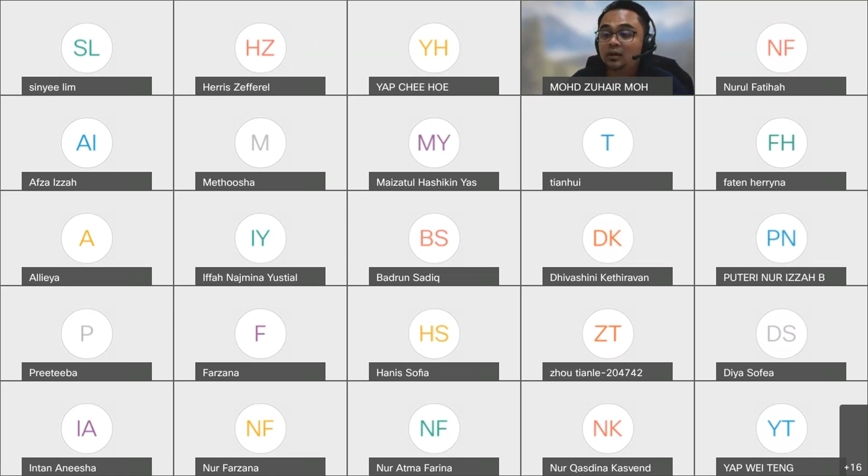So please put this date on your calendar, test two on 16th of June. And what will be covered in test two?

Well, basically what will be covered in this tutorial includes the topic of pure substance as well as closed system energy balance. But for the classes, we've already learned up until the open system energy balance, right?

But for the test, to be honest, I haven't even prepared the questions yet. I'm planning to just ask you up until the closed system energy balance. But any changes will be updated from time to time.

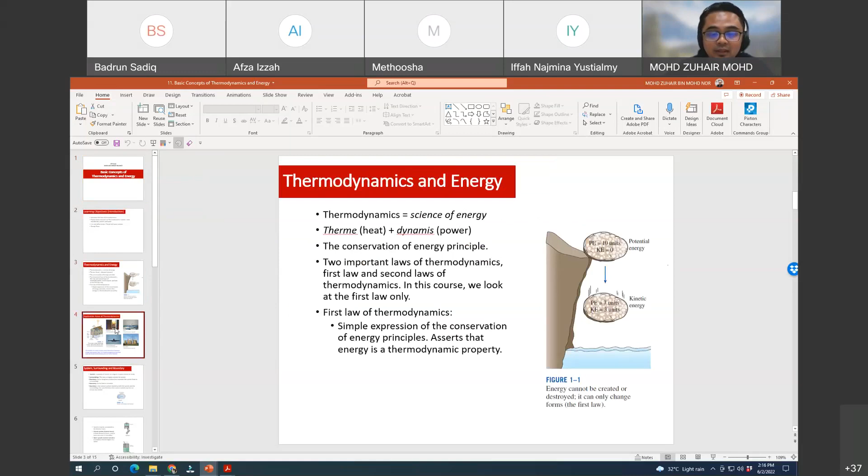What you're going to learn later will be more detailed, but in our case I spared two topics for this. The first two topics are more about theories, which I then asked during the quiz, and it's just basic concepts you need to understand, because some of the terms are a bit confusing compared to the mass balance part. But if you do your revision and refer to the textbook, I hope you won't get confused.

So I'm going to start with the first one, which is the introduction to thermodynamics. There are some terms you need to understand, because these terms will be used in the question.

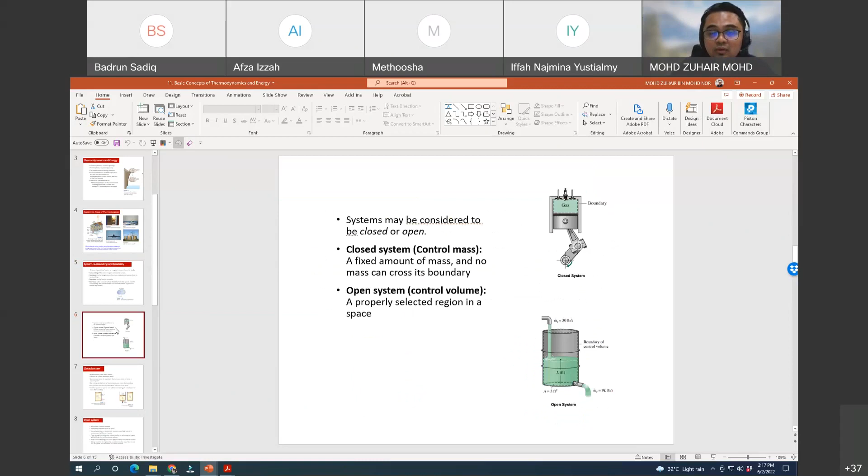When I said about the closed system and the open system, you should straight away know what does the closed and open system mean. In terms of the properties, what kind of properties, and in terms of the process cycle, steady state flow, and so on. Okay, so this is about the first slide.

This slide is just about the theory, and then we move to the second part, which is the properties of pure substances. Still there are few theories, but I just want to highlight that the pure substances we focus on here are more or less water and vapor. If you refer to the real industrial process, it will definitely involve samples that are a bit more complex instead of water. But for us, for the sake of giving you basic understanding on how to do the calculation and how to refer to the steam table, that's why we are referring to just water.

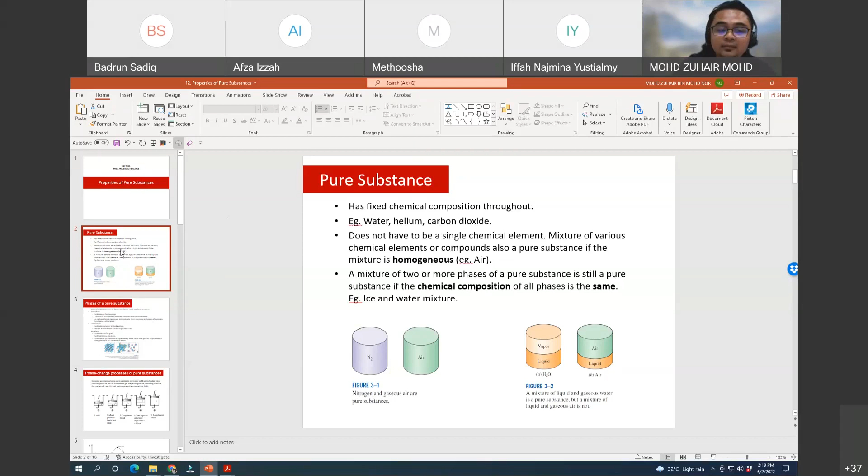So if you refer to the property table that I gave you, it's all about water: steam, saturated water, saturated vapor, superheated steam, and so on. So don't worry when it's stated here as pure substances - I'm referring to water for the time being. But later, in the other subject that is more complex, the term pure substance will be a bit different. For us, let's just speak with water and also ideal gas.

In terms of phase, this is just to give you some understanding about different terms such as the compressed liquid, saturated vapor, saturated liquid, superheated, so that you can at least imagine when phase changes happen during the process. You can imagine in the T-V diagram what happened, in which region the sample is now, because it will give you more understanding on how to do the calculation.

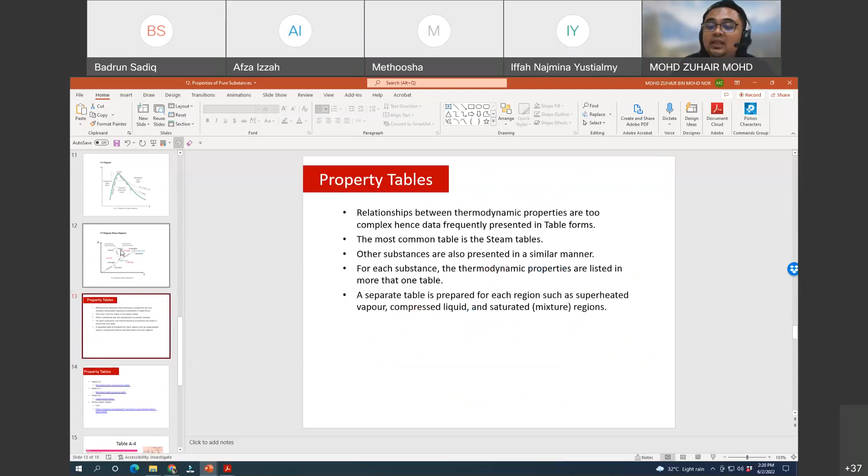But the most important thing here is the property table, because this is something that you will refer to not only for this subject but other courses as well. And if you notice the one that I gave you, we have so many tables, right, mixed together. But for us, for the time being, for this course, because this is just an introduction, we're just going to focus on three tables, which is table A4, table A5, and table A6.

Table A4 and A5 are saturated water - one is based on the temperature table, and one is based on the pressure table. And table A6 is about the superheated water or superheated vapor. I really hope that you are going to at least print out these three tables, so that you can do some practice in order to find all the data from the table.

This table has been prepared by researchers based on the condition of the pure substance, which is water. They have done their very tedious work to prepare and get the value for all of the properties, such as the enthalpy, the internal energy, and so on. So that's why it's convenient for us to just refer to the table.

We also have the online steam table, because nowadays it's more convenient. But in the test you cannot refer to the online steam table. In the case you want to refer to it otherwise, you can also refer to the website - the link has been given here. You just put in the information, and you're going to get all the properties as what you want. So this is the link you can refer to.

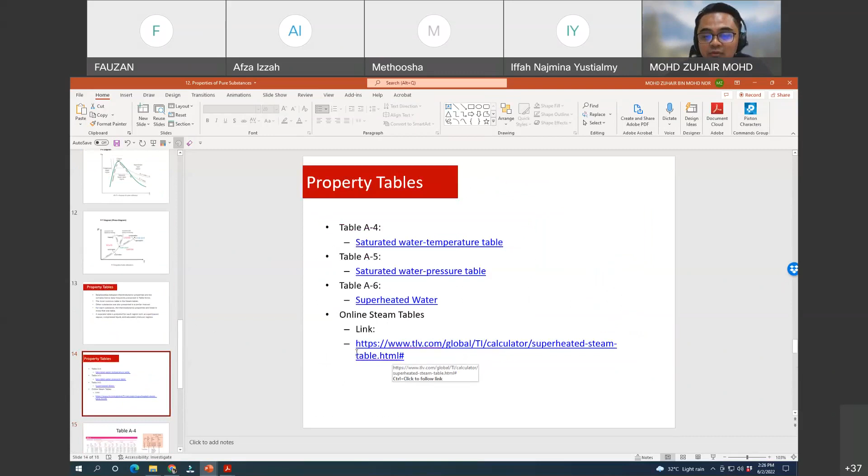Okay, or otherwise you can just go to the website here, just put in the value so that you're going to get the property. Okay, so that's about the pure substances, and then form of energy.

Okay, so the form of energy well actually is just very basic. We have kinetic energy, potential energy, and the internal energy. In which for the potential and kinetic energy, I think that's very straightforward because that's something that you've learned before.

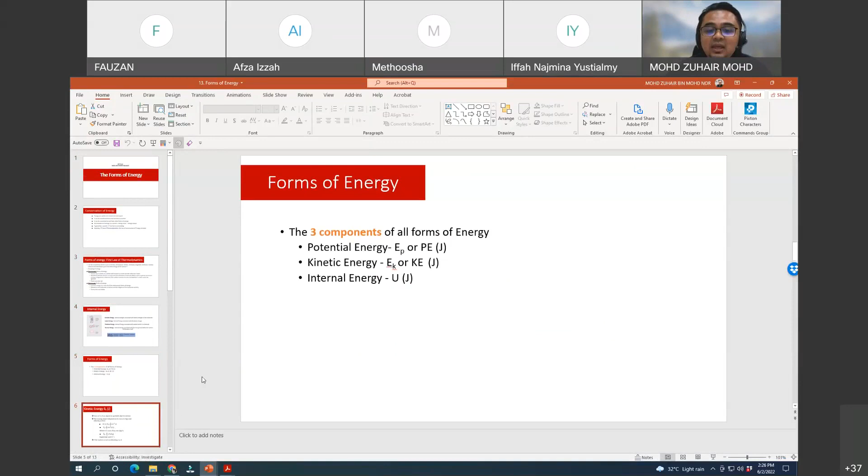But for the internal energy, maybe this is a bit more tricky because it's involved in many kinds, it's related to many things. As long as it's involved the interaction of molecules, that what we consider as the internal energy. So something to do with or any other energy beside potential and kinetic energy will be considered as the internal energy.

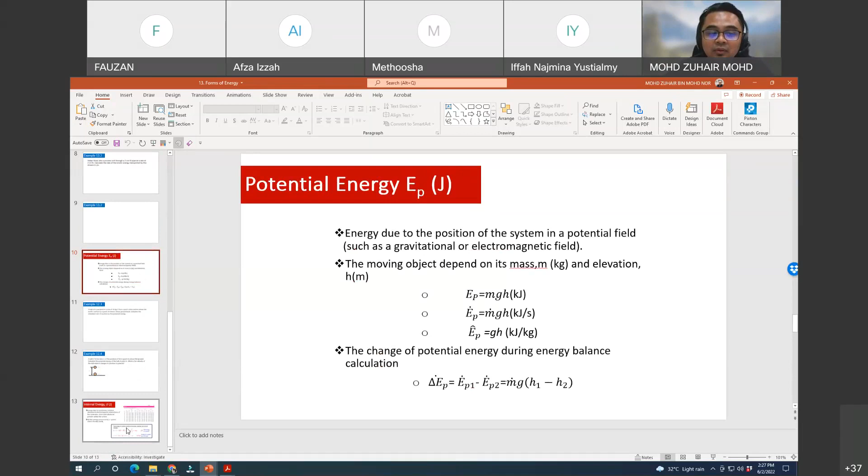Okay, so you need to know how to calculate all of these for you to find the calculation for the energy balance. Okay, for the internal energy, that's why in the previous topic you need to learn on how to find the value in the steam table, because normally for the internal energy we have to refer to the steam table. Sorry, sometimes I use the term property table, but most of the time I'm just going to use the steam table. Okay, so people, when I say steam table, it's also referred to the same table.

Okay, so the internal energy normally we're going to get the value from the steam table. Okay, so it's about the form of energy, and then we go to the closed system energy balance. Okay, so for the energy balance, I hope you don't get confused with the way we calculate the energy, the mass balance, because for the mass balance, we can afford to calculate one single process and also multiple process, you know, because the one that involved is just mass.

But for the energy, we have to calculate not only the internal energy, we have to calculate the heat, the work, the potential energy, and also the kinetic energy. There are so many things. So that's why for this course, we normally just refer to one single process, in which this one single process also involves so much energy. If we compare with the mass balance, for the mass balance part we have single and multiple processes, right? For the energy, we're going to focus on one process.

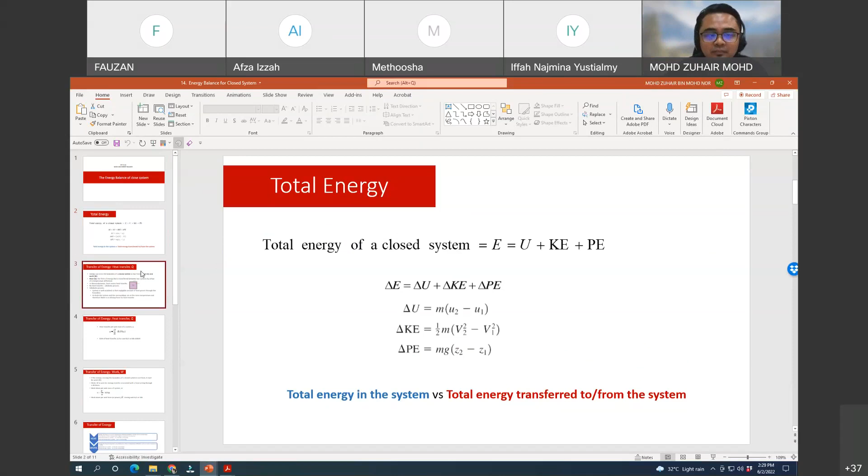Okay. So basically for the energy balance is just... wait a moment. Okay. Sorry, this is not.

Okay. So the energy balance equation that you need to remember is the change of internal energy plus the change of kinetic energy plus the change of potential energy is equal to Q plus W. Sorry, this is plus W, not minus W. Actually Q and W depend on the definition. If Q is going into the system, then it will have a positive sign, but if the system produces heat and it is released into the surroundings, then it will be considered a negative value.

Similarly for work, if work is put into the system, for instance if we introduce a stirrer in a tank, the work is supplied by the surroundings to the system, so that's positive work. But if the work is provided by the system, let's say because of expansion some movement happens from the system to the surroundings, then that can be considered a negative work value. So that's also very important for you to understand, because it will be involved in the energy balance calculation.

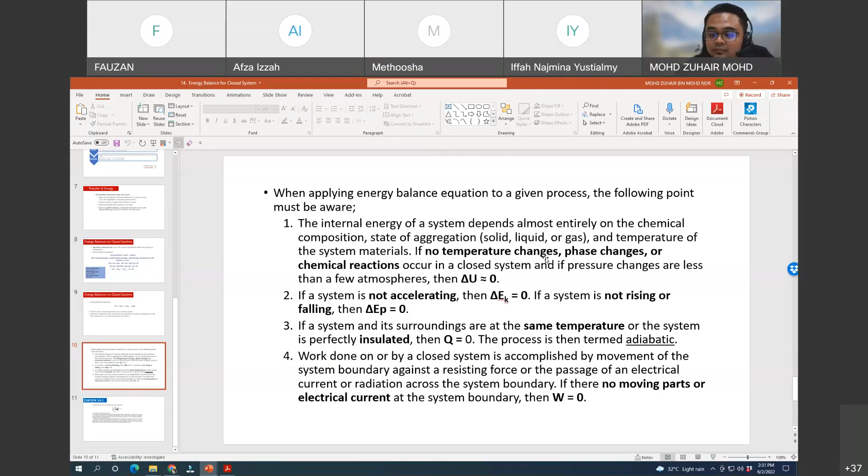Okay, so that's a brief summary of what we have covered this week. I already provided you with another topic, which is the energy balance of the closed system, with more details about the closed system. In most situations, the closed system will not involve potential and kinetic energy, because most of the time it's stationary, since no mass goes in or out. When there is no movement of the mass, most of the time we assume the kinetic and potential energy will be zero. So it's just a matter of internal energy, work, and heat.

Even the work will sometimes be zero. So the closed system is a bit easier compared to the open system. But we'll now do the tutorial in order to solve the questions and get more understanding. So, PDF. Okay, let's start with tutorial 5.

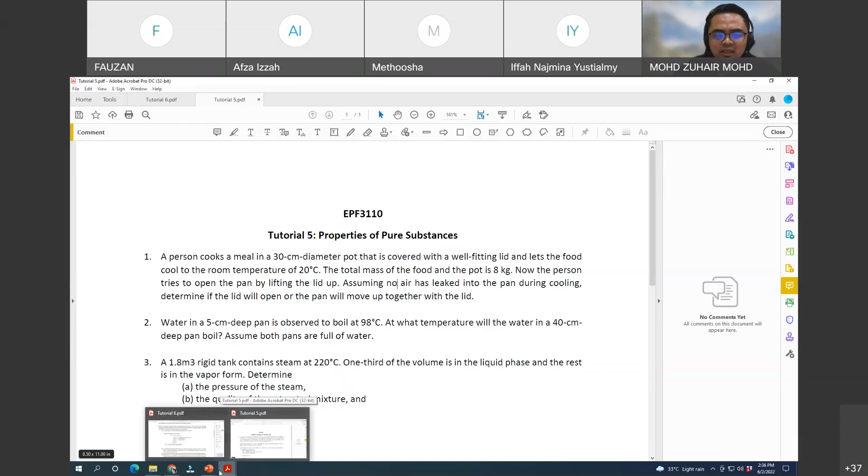Okay, so dia nak cuba nak buka. Itulah periuk tu. Assuming no air has leaked into the pan during cooling, determine if the lid will open or the pan will move up together with the lid. Okay, so when we have some question like this, first of all, what we can do is just to draw first and get all the information before we can try to solve it. Okay, so this is for question 1.

Okay, so we have the pot, and we have the lid. Okay, ini lid dia ya. Okay, so the weight of this is 8 kg. Okay, sorry. So it's not W, it's mass. The mass that we have is equal to 8 kg. And now we want to know the force that is required for us to lift up the lid of the pot.

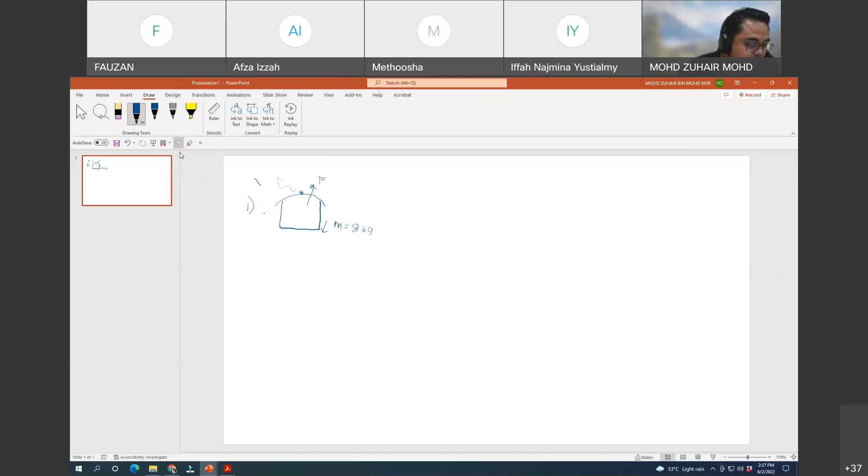Okay, so now the first thing, the temperature is 20 degrees Celsius. So when we want to find the force, first we need to find the pressure. The pressure inside and the atmospheric pressure, in order for us to find F, because F is equal to pressure times the area. So in order for us to find the pressure inside here, we need to refer to the steam table.

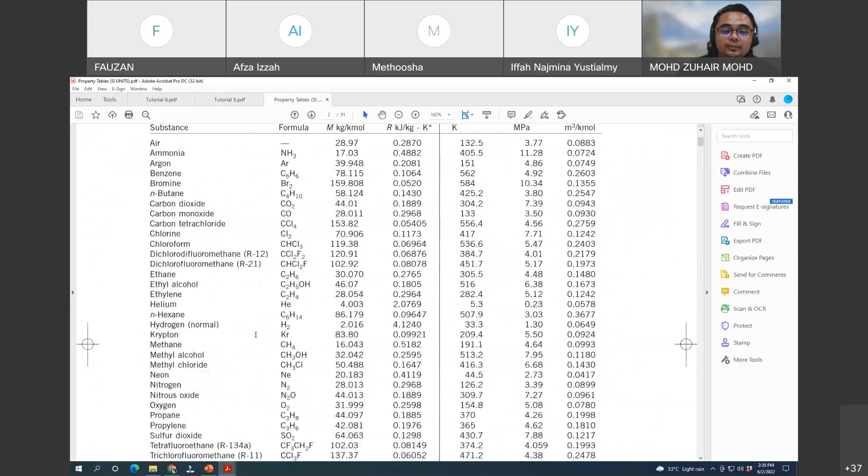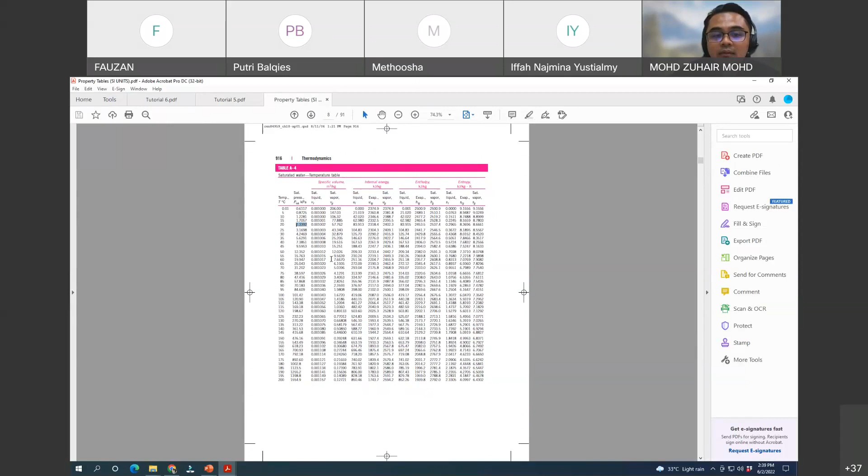Okay, so at 20 degrees Celsius, if you refer to the steam table, the P, how much? Boleh tengok tak dekat dalam steam table? For 20 degrees, steam table A4, at the temperature of 20, what is the saturated pressure? Okay. 2.3392 kilopascal.

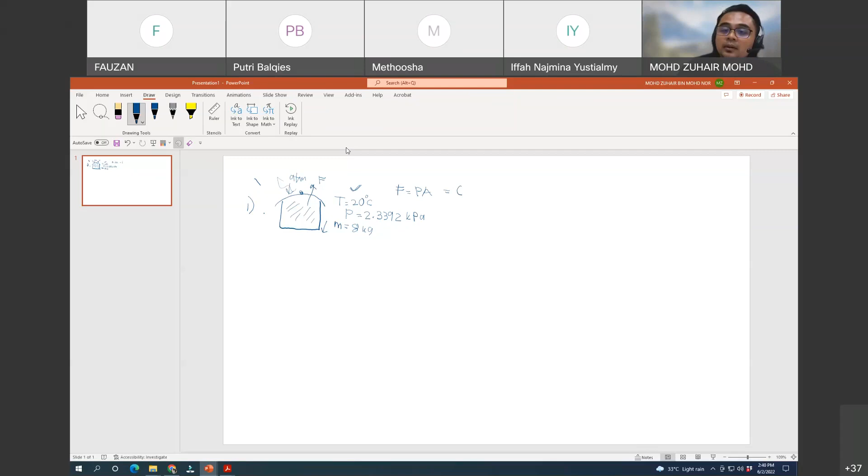Okay, so in order for us to find F, this is equal to the difference between P atm, atmosphere, minus the pressure inside of the pot, times A, the area. And for the atmospheric pressure, we know the value is 101.32 kilopascal minus the pressure inside, 2.3392 kilopascal. And then we have to times the area, which is pi, and it's already stated that the pot has a diameter of 30 cm, right? So we can do the calculation.

So at the end, we are going to get 6.996 kilopascal meter squared. And then we can do this conversion in order for us to find the value in Newton. So 100 kilopascal is equal to 10 to the power of 5 Newton per meter squared. So at the end, we are going to get the value of 6996 Newton. Okay, so this is the force that is required for us to lift up the lid.

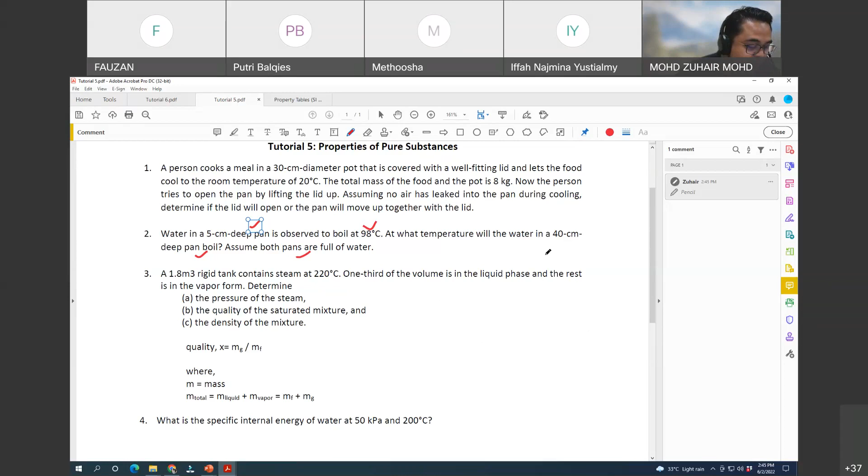What temperature if the water is boiled in the 40 cm deep pan? Okay, so first of all, what you can do is to locate first. Okay, number 2. So we have the pot.

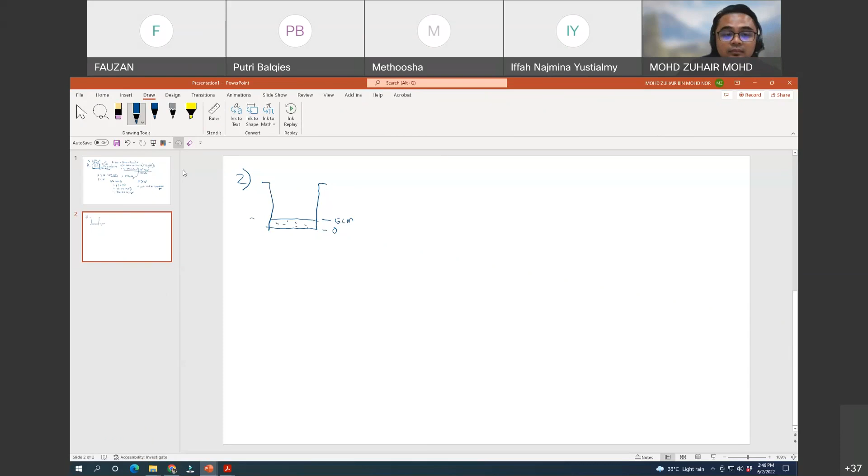So the first one is at 5 cm. Okay. So this is 0, this is 5 cm. Okay. And it stated the temperature, which is 98. You see, what about if we increase the water to 40 cm? What is the temperature? Okay, so first of all, we already have the temperature here for us to get the pressure.

Yeah, P equals rho g h. So pressure is equal to density times gravity times height in order for us to get the pressure. Okay, so what you're going to do first, we will refer to the steam table to find the pressure at this condition, which is 5 cm, 98 degrees C.

Okay, so if you refer to the steam table at 100 degrees C, sorry, 98, okay, we couldn't find 98 degrees C. Can't, right? 98. Hmm.

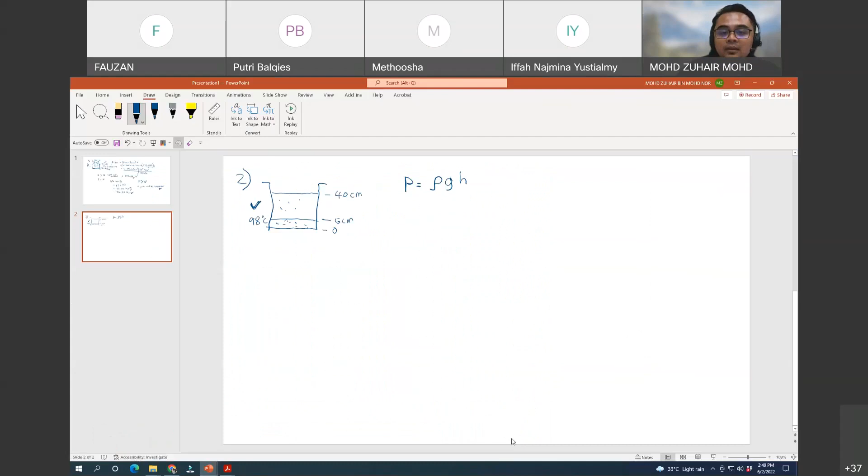Okay. If you refer here, at 95 degrees C, the saturated pressure will be 84.6. And at 100 degrees, the saturated pressure will be 101.42. So we are going to do interpolation for that, okay? For 100 degrees C, the P saturated will be 101.42 kilopascal. For 95 degrees C, the P saturated will be 84.609 kilopascal.

Okay, so how to find it at 98 degrees C? This is where we do the interpolation, which involves, first of all, 98 minus 95, the lower one, and then 100 minus 95. We minus this with the lower number, and then the highest number minus the lowest one. Okay, and then we are going to calculate the difference between these two.

101.42 minus 84.609. Okay, and then plus the lowest value, which is 84.609. So at the end, you are going to get the P sat for the 98 degrees C condition, which is 94.6956 kilopascal. So this is what I call interpolation.

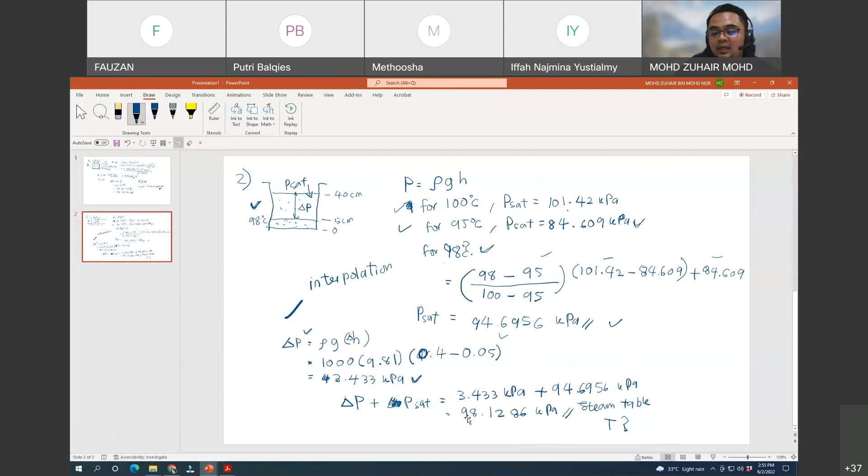Okay, so from here we can refer to the steam table to get the temperature. Because now this is pressure instead of temperature, instead of table A4, we need to go to table A5, because it's now based on the pressure. So what is the value? 98.12. We don't have 98.12 here, right? We only have 75 and 100 kilopascal.

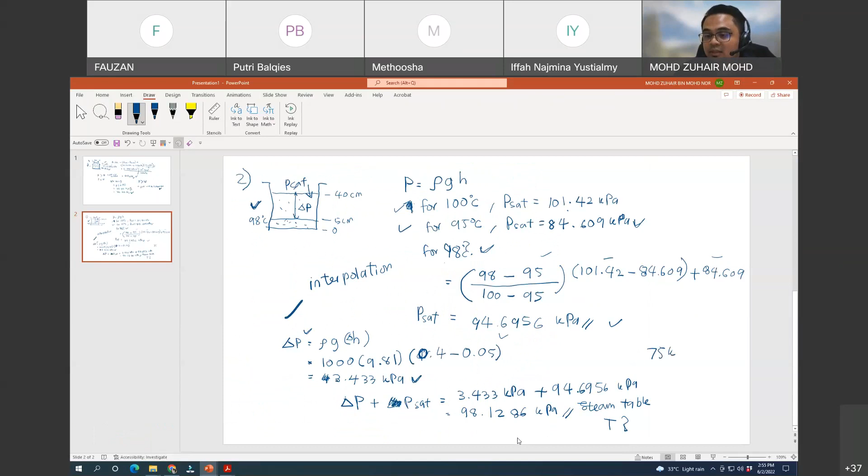So in order to find the T saturated there, we need to do another interpolation. Okay, so for that, I want you to do it. Let's say this is for 75 kilopascal, and for the 100 kilopascal, what is the value? 91.76 degrees Celsius. At 100, we have 99.61. Yes, 99.61.

Okay, so similar to this one, you need to do the interpolation. I'm not going to show you, but I'll give you the final answer: if we increase the water to 40 centimeters, the temperature will be 99.03 degrees Celsius. Okay, so this will be the final answer. You need to do some interpolation, okay? So this is for question 2. Any questions?

Okay, so now we are going to do question 3. Question 3: a 1.8 cubic meter rigid tank contains steam at 220 degrees C. One third of the volume is in the liquid phase and the rest is in the vapor form. Determine the pressure of the steam. What is its pressure? And then the quality of the saturated mixture. The quality of the saturated mixture is the mass fraction.

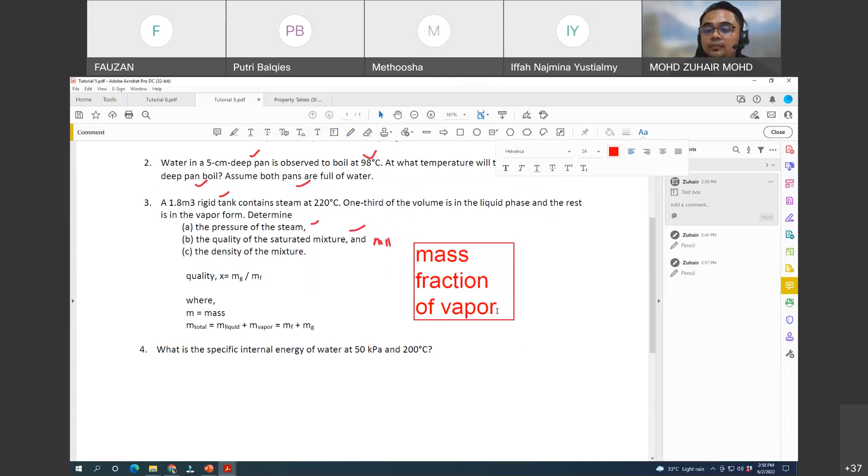Mass fraction of vapor. Okay, so for this one, normally we just use the symbol X. And lastly, the density of the mixture. Okay, so the quality is already stated here. The quality X is equal to the mass of the gas divided by the total mass.

Okay, so let's start with the first one, 3A, the pressure of the steam. So we have the temperature at 220, and this is a mixture between vapor and liquid. So we need to refer to the right table, which is steam table A4. The T is 220 degrees C. So if you refer to table A4, the P saturated will be,

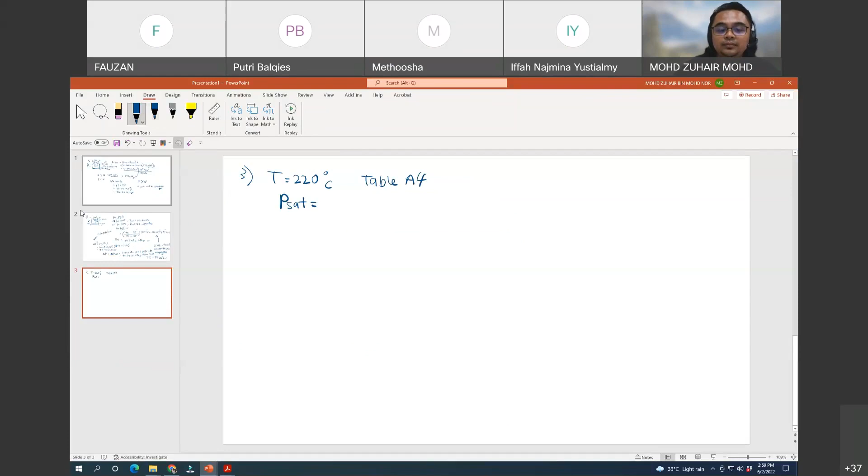so we go to table A4, at the temperature of 220, the P saturated will be 2319.6 kilopascal. Okay, so this answers the first question, the pressure of the steam. We already had the temperature, now we know the pressure of the steam. And then the second question is the quality, which is the mass fraction. Okay, so the mass fraction, this is A, this is B.

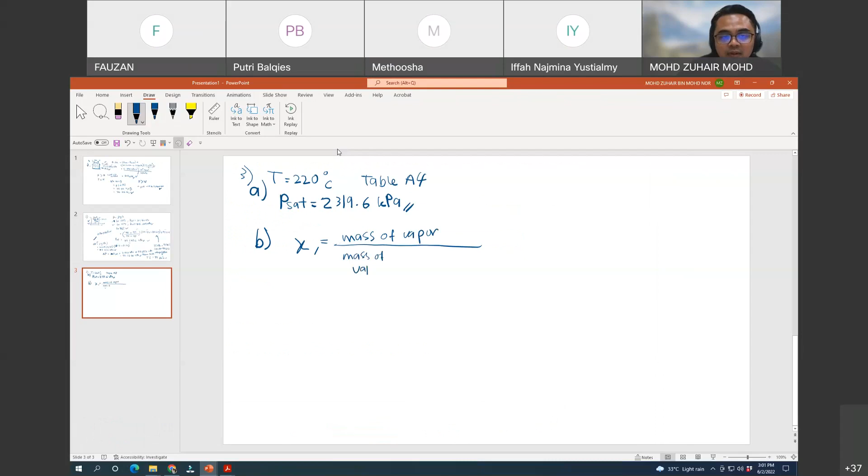Okay. The mass fraction will be the mass of vapor divided by mass of vapor plus mass of liquid. Okay, so how to find all of this mass? In order for us to find the mass, we need to find each one first, okay?

To calculate the mass of the liquid, we need to also refer to the steam table, because here, if you notice, this is based on the kg. So this is all specific. So after some rearrangement, we can find the mass if we have, let's say, the specific volume and so on, okay? So I'm going to show you now. For instance, the first one: mass will be the volume divided by the specific volume of the fluid. We start with the fluid first, okay?

So the volume of the fluid, how to find the volume of the fluid? Well, basically the question already stated that the total volume is 1.8, okay? And it's already stated here that 1/3 of the volume is liquid and the rest is vapor form. So we can just use that to find it. 1/3 is the liquid and the rest, 2/3, is vapor. For liquid, 1.8 times 1/3. So this will be the volume in meter cube.

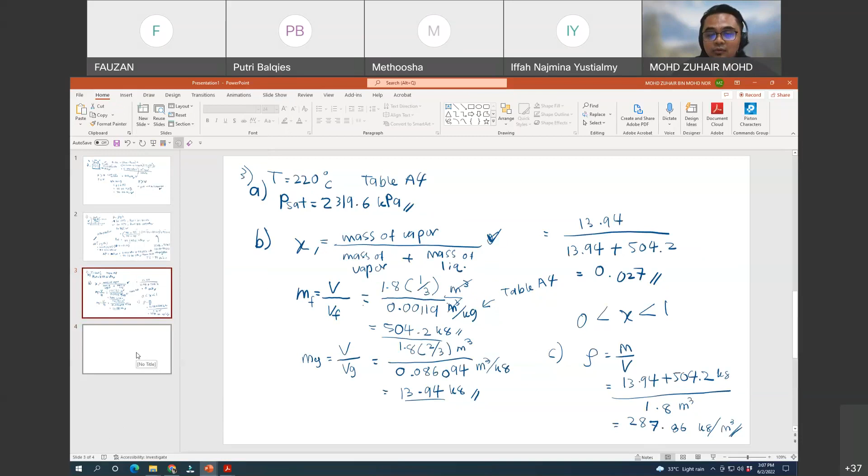Okay, and then we move to the last question, which is what is the specific internal energy of water at 50 kilopascal and 200 degrees C. Normally, the normal type of steam table that we refer to provides only one, either the pressure or the temperature. But in this case, it already gives you two values, the pressure and also the temperature. So which table should we use?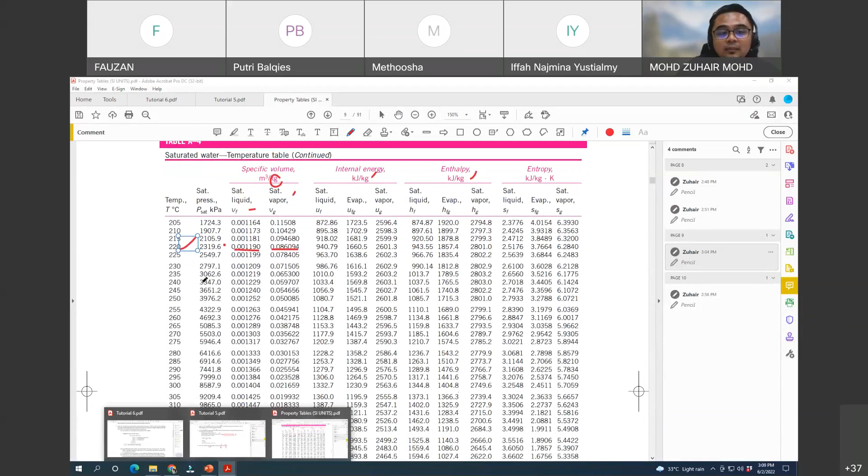So first of all, we want to determine whether this is a mixture of saturated water and vapor, or is this superheated steam? I'm just going to list it first. Number 4: we have P 50 kilopascal, and T, which is 200 degrees C. Let's start with the temperature first. The temperature is 200. But based on here, when the temperature is 200, the pressure is 1554.9. But the one that we want is only 50 kilopascal. So we cannot use this table.

What about table A5? If you refer to 50 kilopascal, the temperature there is 81.32, but we want 200. So we cannot use this table.

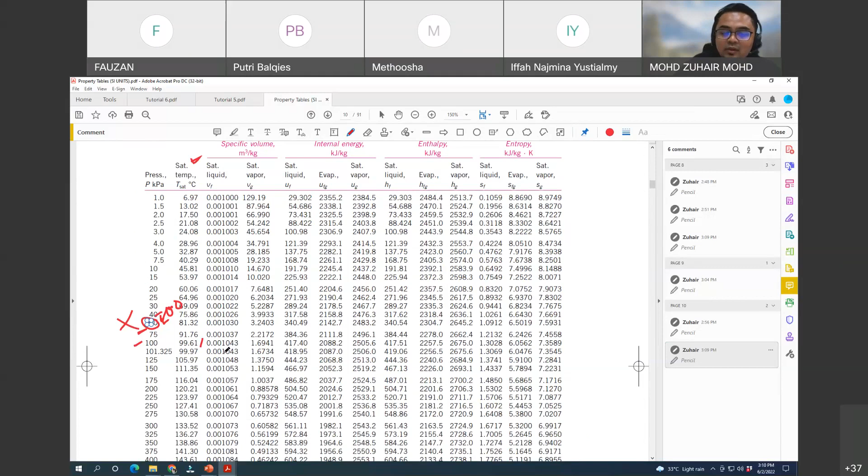So this is an indication that this is not a mixture between saturated liquid and saturated vapor, but instead it is a superheated steam. For us, we have to refer to another table, which is table A6, in order to solve it. I'm just going to give you the condition for superheated steam.

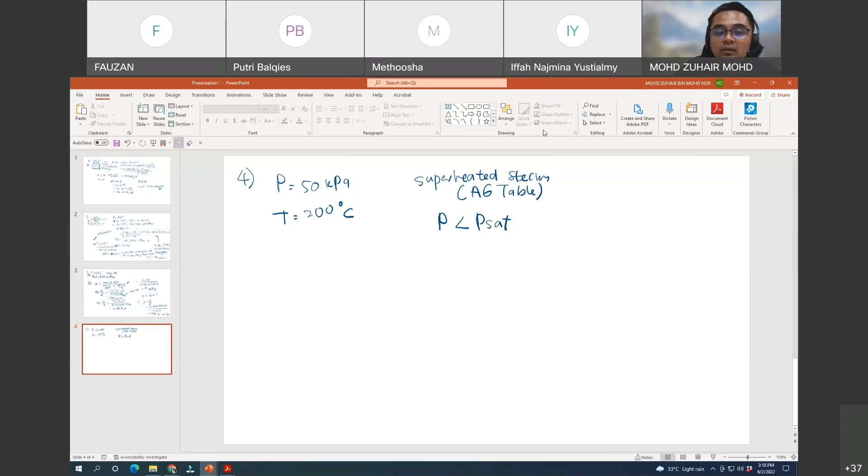And for this, we can refer to table A6. First of all, the pressure will be smaller than the pressure of saturation, and the temperature will be bigger than the T sat. So in this condition, the first condition was 50 kilopascal.

The temperature there is very low, it's 81. So if the temperature is 200, the temperature should be bigger. For us to determine whether it's superheated or not, the temperature should be bigger than the T sat. The T sat is just 81 degree C, and here we have 200.

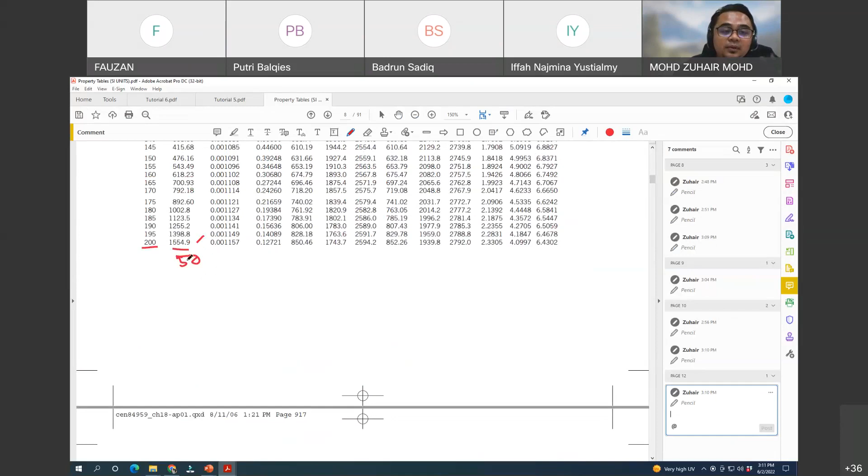And then the other thing is the pressure. If the temperature is 200, the pressure here is 1554 kilopascal. But the one that we want is only 50 kilopascal. So this also indicates that this is a superheated steam, because the pressure is smaller than the saturated pressure and the temperature is bigger than the saturated temperature. So once you encounter this kind of situation, you just need to refer to table A6.

Let's go to table A6, because it's more convenient: for different temperatures we have different types of pressure. I don't know why they make it in megapascal, because all the calculation will be in kilopascal. That's why you need to change to megapascal if you want to find it.

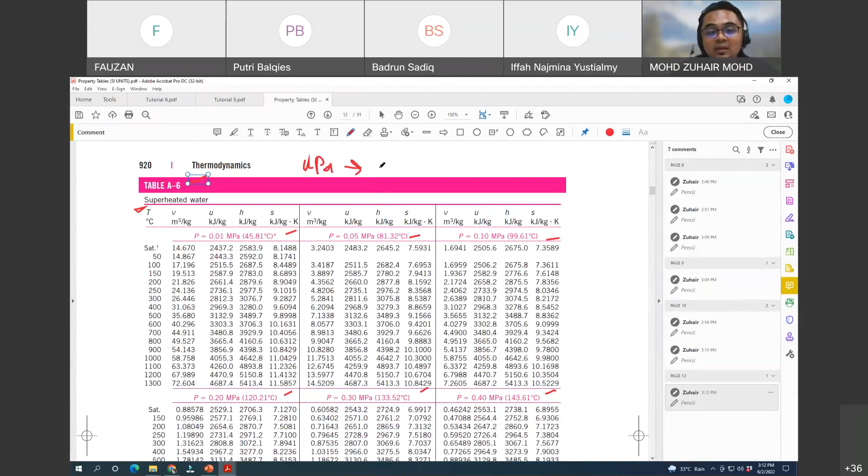Let's say for instance now we have the pressure at 200... sorry, we want the pressure at 50. The temperature is 200. Now we want the pressure at 50 kilopascal. So 50 kilopascal is equal to 0.5 megapascal, right?

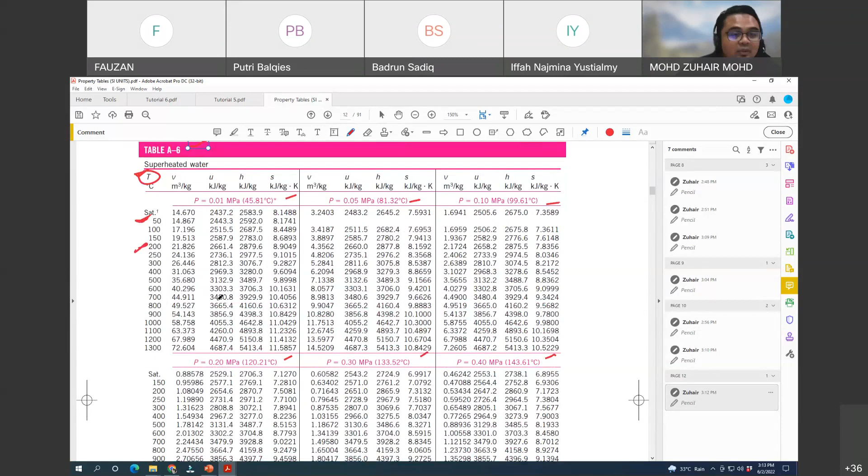So just go here. We have this at the temperature of 200 and at the pressure of 50 kilopascal, then we can find the internal energy, which is U. So the internal energy will be 200... sorry.

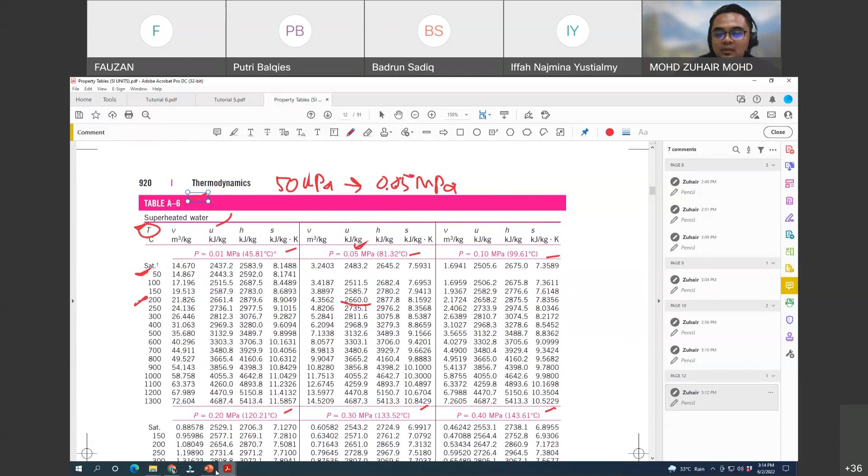Oh sorry, look, I made a mistake too. 50 kilopascal is equal to 0.05 megapascal. So 200 with the 0.05 megapascal, we are going to get the internal energy of 2660. So the answer for question 4, the internal energy will be 2660 kilojoule per kg.

This is the specific internal energy, based on table A6. It's asking about the specific value, so we don't have to change it further. So that's about the pure substance tutorial.

I know if you're not really familiar with the steam table, you will need some time to refer to it and try to extract the information. But that's why I really urge you to familiarize yourself with the steam table, so that you will be able to get the information as quickly as possible, because during the test and exam you don't have ample time. So it's very important for you to practice using the steam table so that you get familiar with how to extract all the information.

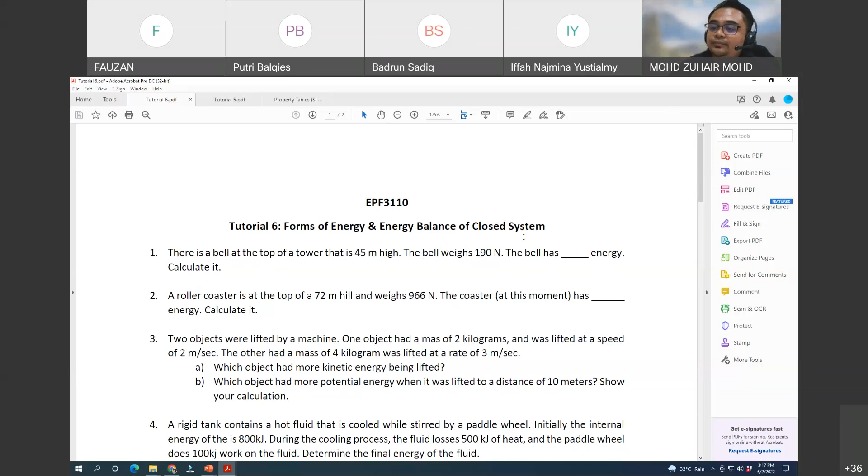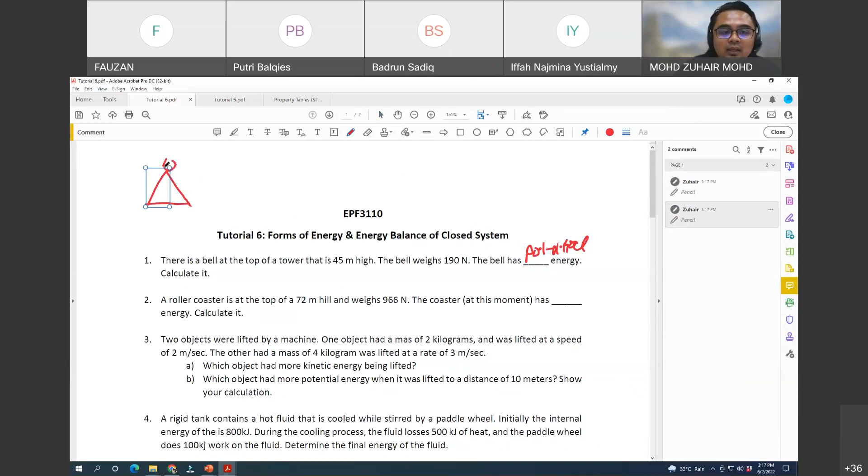Anyone want to guess the potential answer? Potential energy? Okay, good. Yes, this is potential energy because it's involved with the height. Okay, so imagine that this is a tower, and then we have the bell on top of the tower.

Okay, and the height, this is 0, this is 45 meter. We need to calculate the bell's weight, 190 Newton. So what is the formula for potential energy? PE is equal to mgh. It's going to change to here.

So this is tutorial 6, question 1. We have a tower, and then we have a bell on top of the tower, and the height is 45 meter. This is the basis, which is 0 meter, and the weight is 190 Newton. So this is potential energy because it doesn't have any movement whatsoever. It just has the height, potential energy. Potential energy, PE or EP, is equal to mass times gravity times the height.

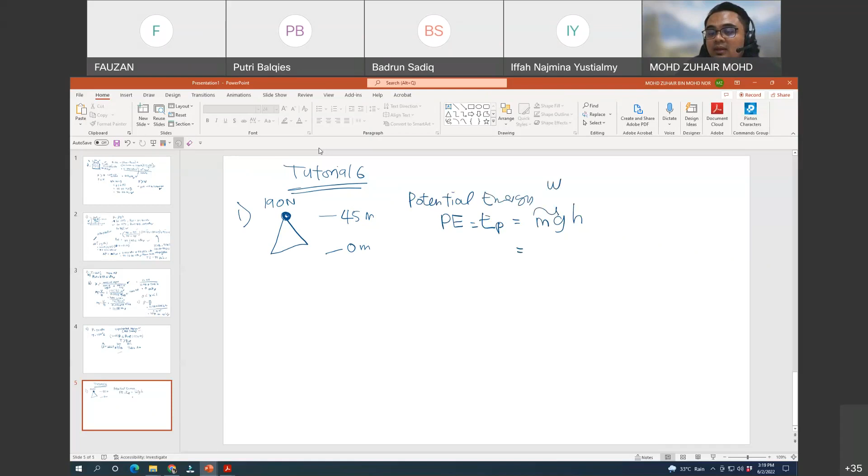So in this case, this is actually the weight, because it's considered the gravity. So this already represents that. So 190 Newton times the height. The height is 45 minus 0. You have to bear in mind that we have to put some basis. So this is the height, 45 meter. After doing the calculation, you're going to get 8,550 Newton meter, in which Newton meter is equal to joule. 8,550 joule. So this is the final answer for question 1.

Very basic, as long as you know how to calculate the potential energy. Okay, number 2 question.

Number 2. The roller coaster is at the top of a 72-meter hill, and the weight is 966 Newton. So at this moment, the roller coaster has what energy? Is it potential energy or kinetic energy? It's potential energy, because it's related to the height, not movement. So let's just do that. Potential energy, mgh, and then we have the weight already.

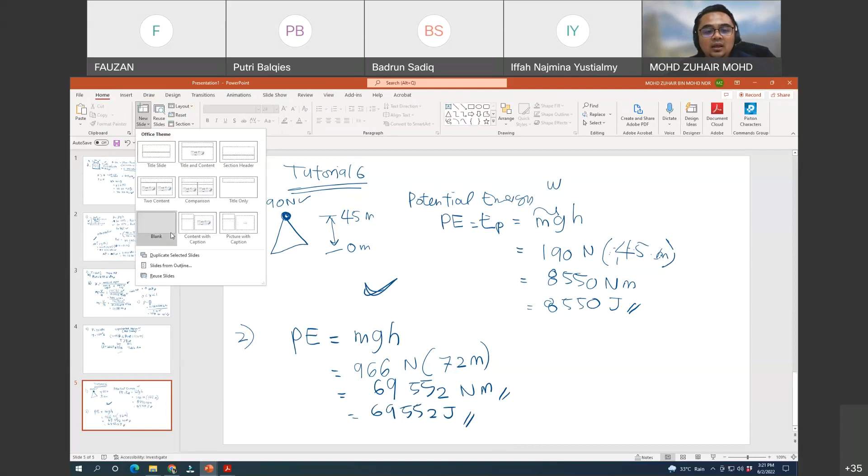Okay, and then we are going to do question 3. Two objects were lifted by a machine. One object has a mass of 2 kg and was lifted at a speed of 2 meter per second. The other has a mass of 4 kg and will be lifted at the rate of 3 meter per second. So, which object has more kinetic energy? This question is interesting to answer, because it has two conditions.

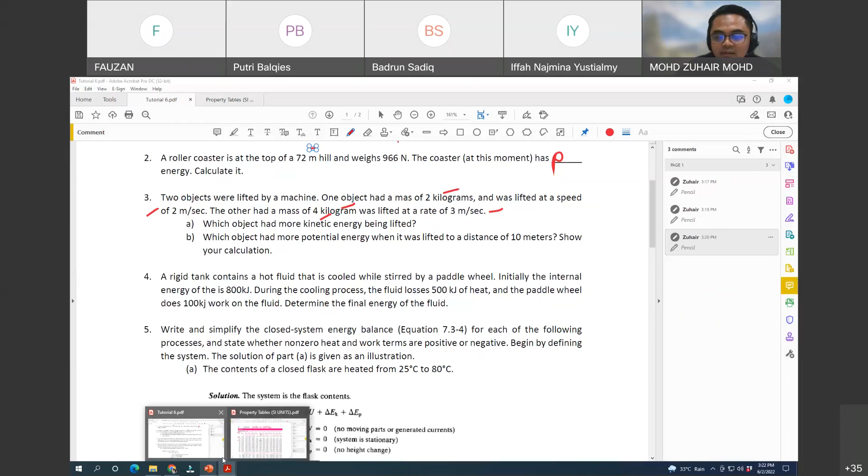Okay, let's just try to solve it. Question 3. We have two balls, ball 1 and ball 2. Both will be lifted up. One has a mass of 2 kg and the velocity it's lifted up at is 2 meter per second, and the other one is 4 kg with 3 meter per second. So the question asks which one has the bigger kinetic energy. So kinetic energy is equal to what?

Half m v power of 2. Okay, so let's just try the first kinetic energy, kinetic energy 1. Okay, so kinetic energy 1 is half times 2 times 2 power of 2.

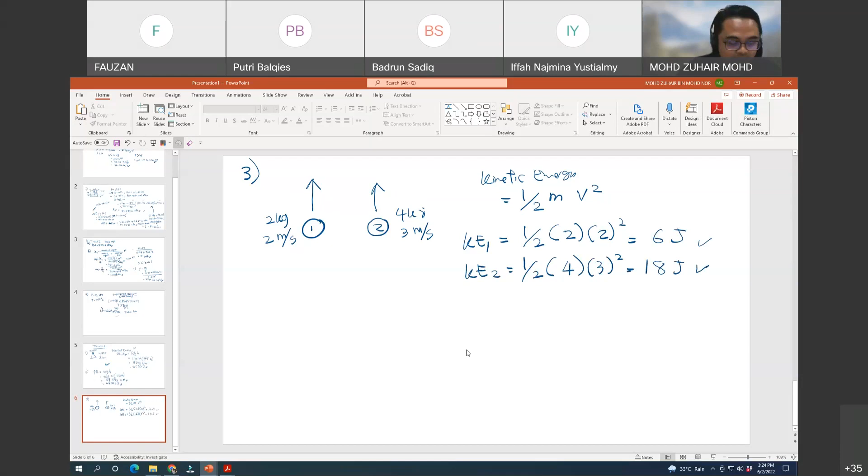So the kinetic energy will be 4 joule. Please also list down the units and how you get joule at the end, because in my case this is just a shortcut since I want to go fast. Half times 4 times 3 power of 2, we get 18 joule. So we have 4 joule for energy 1. So kinetic energy 2 is bigger than kinetic energy 1.

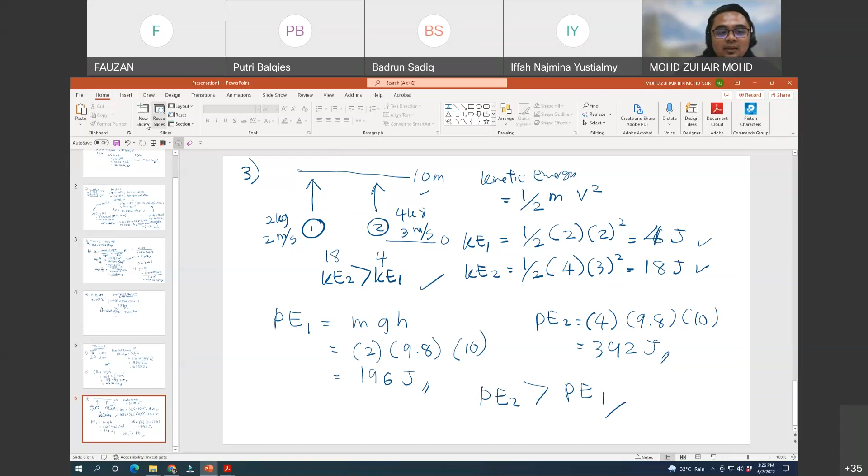3. Okay, so question 4. A rigid tank contains a fluid, hot fluid that is cooled while stirred by a paddle wheel. Initially, the internal energy is 800 kilojoule. During the cooling process, the fluid loses 500 kilojoule of heat and the paddle wheel does 100 kilojoule work on the fluid. Determine the final energy of the...

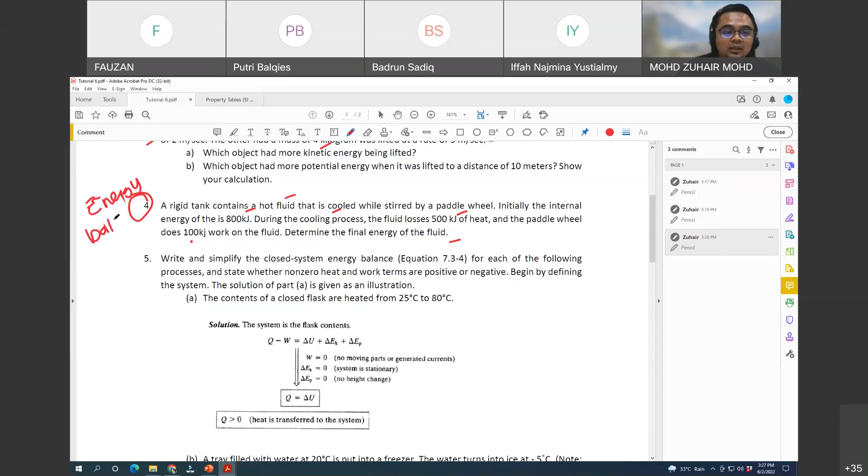Okay, so starting from question 4, this is already about the energy balance. Yang tadi, yang sebelum ni is about the form of energy balance closed system.

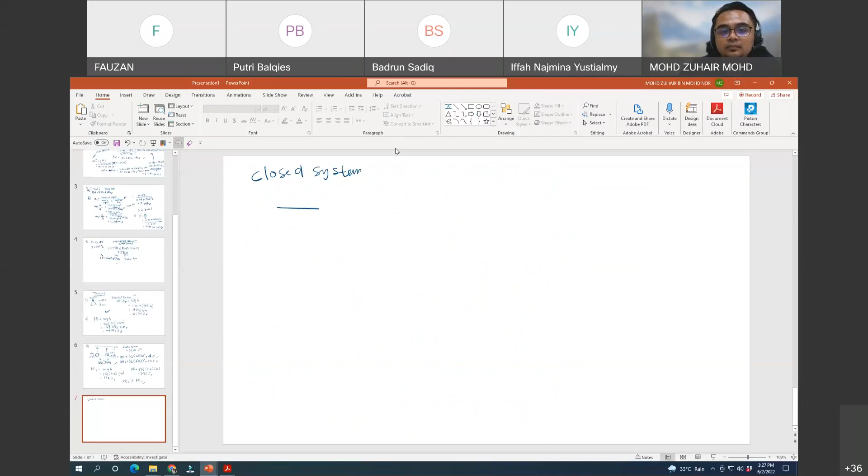Okay, apa maksud energy balance closed system? Kalau closed system, the mass inside will not going to change because there's no movement of mass to in and out. The mass will remain like this. But there will be some changes in terms of the heat as well as the work.

Okay, the heat and the work, Q and W, can go in or go out. And also it's the way we kind of like interpret the value of the Q and W, whether it's positive or negative, depends. Okay, if the heat and the work introduced into the system, the value will be positive. But if the work and the heat was produced by the system, then this is negative. So you have to be very careful to interpret whether this is negative or positive, depending on the situation.

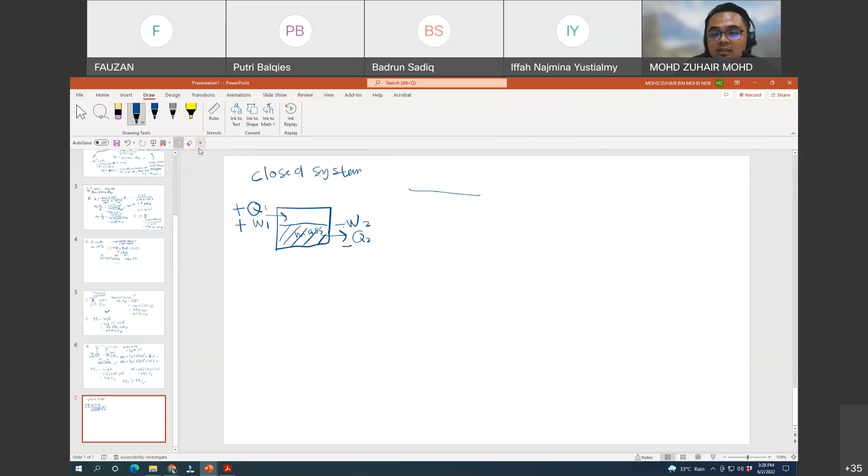Okay, so now we have a system. Okay, answer for question 4. A system in which is a closed system, but it have a stirrer. So they have a work. Okay.

So dia mula-mula dia hot fluid kan, lepas tu dia sejukkan by using a paddle wheel, ada mixer kat bawah tu. Initially the internal energy of the system is 800 kilojoule, during the cooling then the energy had been lost into heat and the paddle does work. Okay, so what we need to do is to

do the energy balance. Okay, so we just list down all the things that we know. Okay, the internal energy initially, it says the internal energy because it's already very hot punya liquid is 800 kilojoule, and then the Q that had been released out, so dia cakap dia ada loss kan Q dia, so it's negative 500 kilojoule.

And then we have work that had been introduced by the stirrer into the system. So bila introduced is positive 100 kilojoule. What else? Okay, so when we want to do an energy balance, the best practice is to list down the energy balance first. What is the energy balance? It's Q plus W equals to the change of kinetic energy plus the change of potential energy plus the change of internal energy.

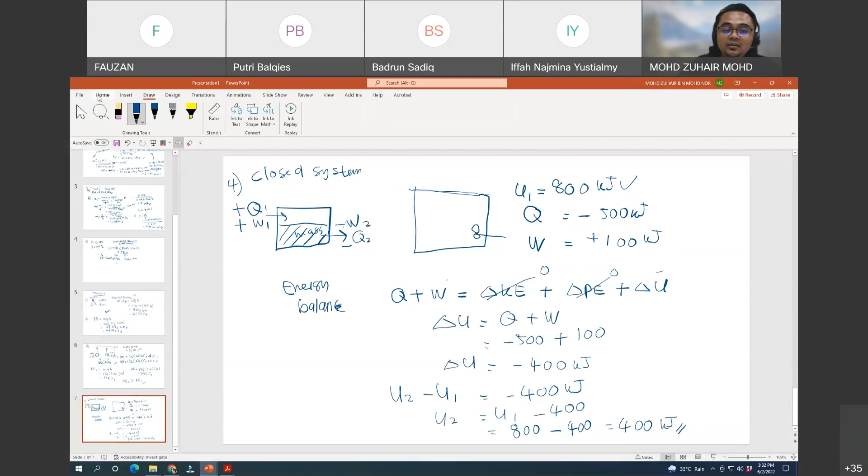Yeah, the final energy of the fluid. Okay, the final energy of the fluid, which is here 400 kilojoule. Boleh dapat? Senang kan yang ini? Any question for this one? The energy balance? I think if you just go back slowly, you're going to get the idea, okay?

So we are going to solve question 5. Write and simplify the closed system energy balance for each of the following processes and state whether the heat and the work terms are 0 or not, and whether they're positive or negative. Begin by defining the system. The solution of part A is given as an illustration. Okay, so this is just to give you understanding on whether we have to consider the Q, the W, the potential energy and so on. So let's just try to do it together.

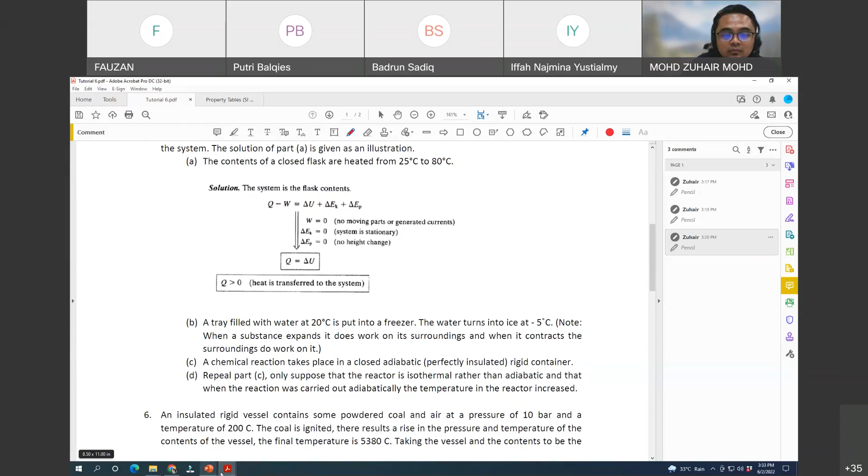Okay, the first situation, the contents of a closed flask are heated from 25 degrees C to 80 degrees C. Okay, so dah bagi pun dia punya solution kat sini. In terms of this system, kisah senang. Okay. I think the best way is to draw the process first, okay? So in this case, it's a flask that has some Q going in, okay, to increase the temperature.

So let's just list down back the energy balance: Q plus W equals potential energy plus kinetic energy plus U. So based on the situation here, which one do you think is 0? There's no movement, right? There's no movement and no height. So potential energy and kinetic energy will be 0. What about work? Any work related here? Ada tak apa-apa perbuatan kerja dekat sini? No, there's no pedal, there's no anything. So the work will be 0.

So in this case, Q will be equal to the perubahan, the change of the internal energy. Okay, and considering that the Q is introduced into the system, it's not released from the system, so in this case Q is bigger than 0, so it's not going to be negative. Okay, this is just an illustration of how the system should work for A. Okay, now we move to B pula.

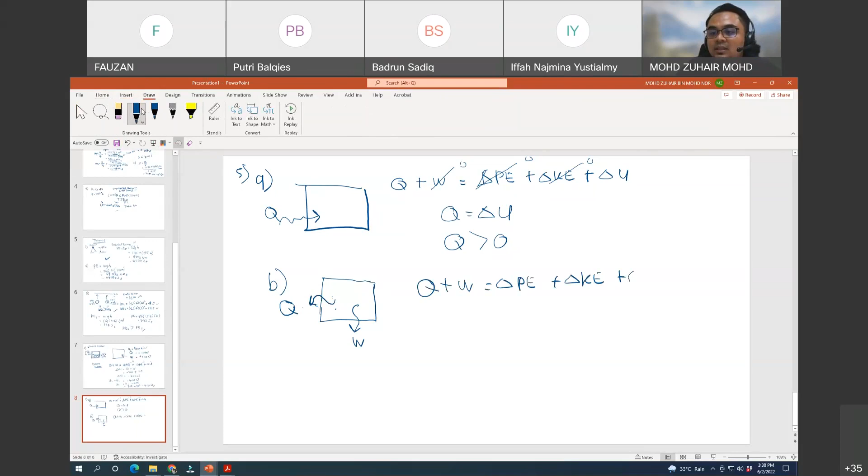However, at the same time, the heat also had been released out. Kan, from 20 degrees C, it's turned into negative 5 degrees C. So definitely the Q also had been released out. So in this case, kita balik, Q plus W equals PE plus KE plus U. Okay, so potential energy not available, kinetic energy not available. So now we have all of this.

Okay, so in this case, will the Q be positive or negative? Because it's been released out into the surrounding. Negative or positive? Negative. Negative Q. What about the work? Is the work positive or negative? Negative. Positive. Sure. Because the work should be negative actually.

Oh, okay. So the work should be negative because the work had been produced by the system into the surrounding. So this would be negative. So negative Q, negative W equals internal energy. Sekejap. Sepatutnya negative work.

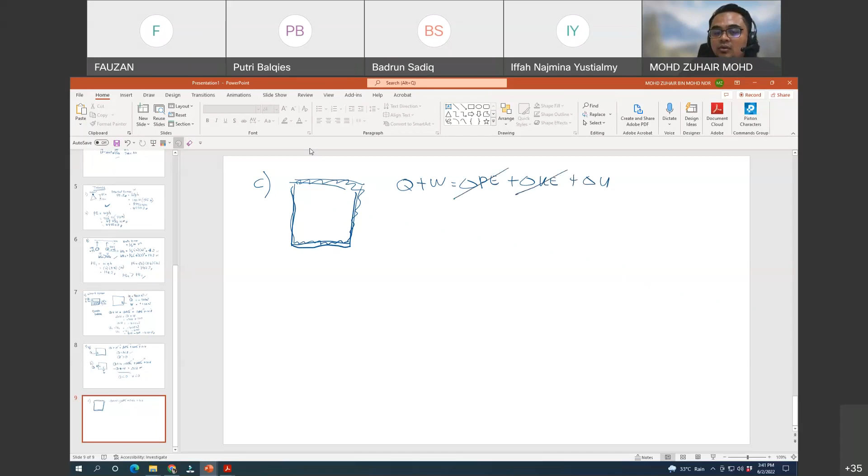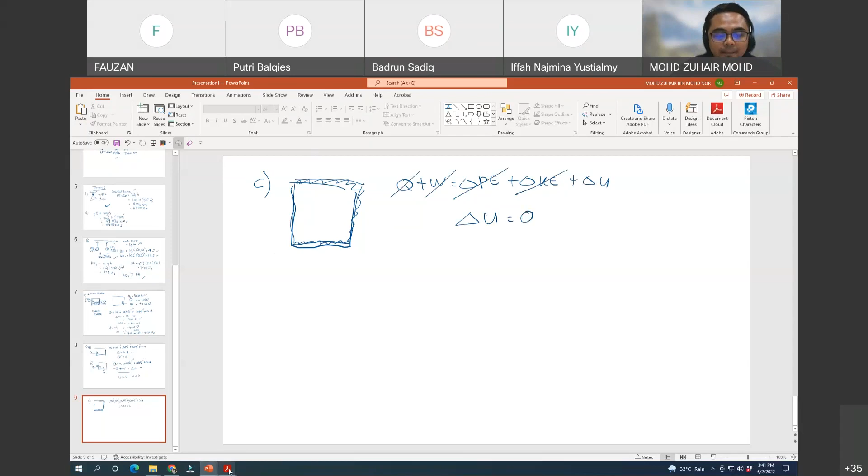So in this case, Q plus W equals potential energy plus kinetic energy plus U. So in this case, this is 0, no heat, no work. So even for that, the internal energy will also equal 0. Although a chemical reaction happens, walaupun ada chemical reaction happen, tetapi the chemical reaction tu dia tak consider as part of the energy because it's perfectly insulated. Okay, so this is what we get for C.

And what about D? For D, repeat part C only suppose that the reactor is isothermal rather than adiabatic. Maksud isothermal apa? When the reaction is carried out adiabatically, the temperature in the reactor increases. Okay, so this is adiabatic. Now we have a system which is isothermal. Isothermal means that the temperature inside is maintained. So if the chemical reaction produces heat, in order for us to maintain the temperature inside, we need to release some of the Q out.

So Q plus W equals PE plus KE plus U. So work tak ada, potential energy, kinetic energy tak ada. Now we have the Q equals the internal energy, and the Q will be smaller than 0 considering that it has been released out from the system.

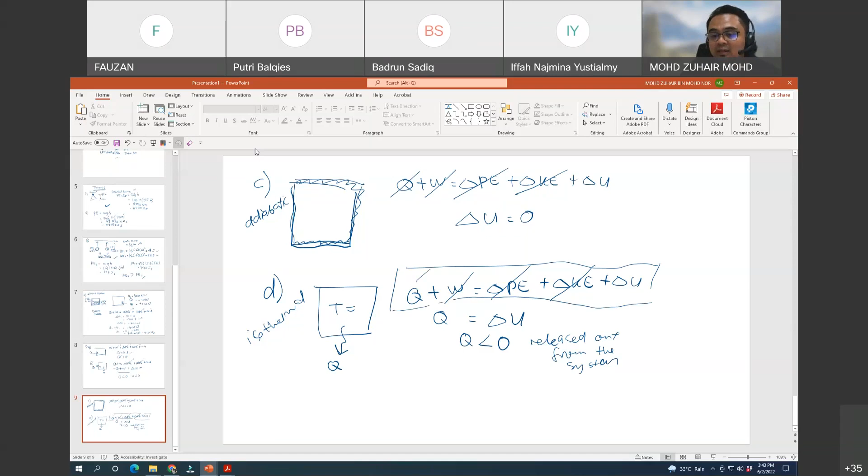Okay, so this question A, B, C, and D just gives you scenarios for you to understand the difference between different scenarios. If you know how to do the energy balance like this, then you can straight away do the calculation. You can find the Q and the other properties that are available here. Okay, so that's for question 4.

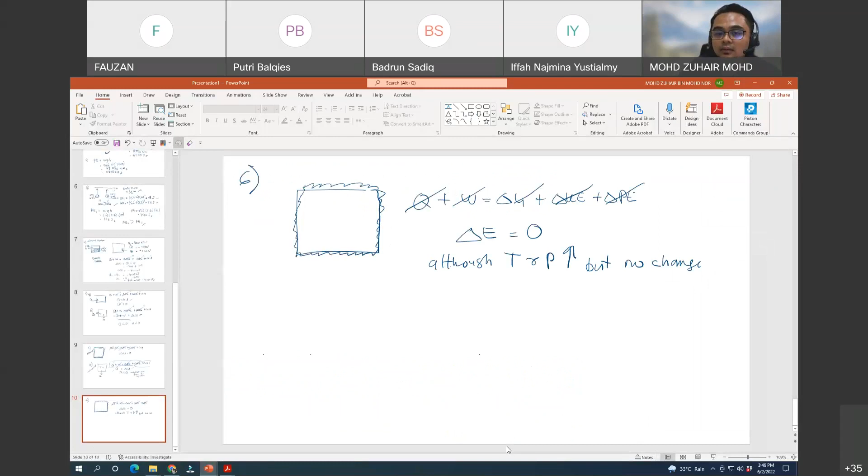This is because although it's stated here the coal is ignited, resulting in a rise in pressure and temperature of the contents of the vessel, and the final temperature is 5,380 degrees C, because it's insulated we just assume that although T and P increase, there's no change of energy. The energy from the chemical reaction has been directly converted into internal energy. So that's why for case A, no change of energy happens.

But let's say in case B, the insulation is now removed, and a heat transfer of 50 kilojoules from the system causes the temperature to fall to the initial value 200. So now in case B, no insulation. So some heat has been released out, and if it's released out it's negative kilojoules.

Okay. So now we can calculate Q plus W equals internal energy plus kinetic energy plus potential energy, with 0, 0 and 0. So now the heat is negative 50 kilojoules, which equals the internal energy, which is also equal to the change of energy. So in situation B, the total change of energy will be equal to negative 50 kilojoules.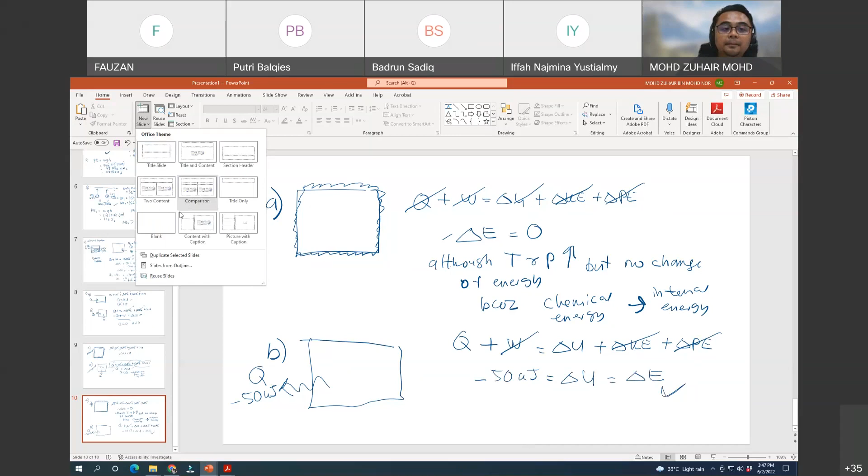What about C? Taking the initial energy of the system 32 kilojoule. So the initial internal energy 32 kilojoule. Write down the energy values after process A and after process B. Okay, kau boleh belit. So this is for C.

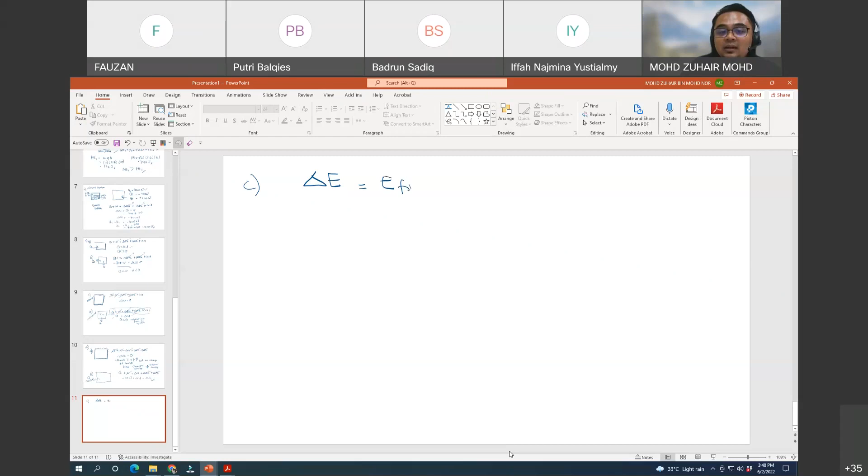We are talking about the changes of energy. That means the energy final minus the energy initial. Okay. So the question asks about the final energy. That means the changes of energy minus the energy initial. So we have the changes of energy of negative 50 kilojoule, and the initial energy is 32. So the final energy that we want to find is negative 18 kilojoule. This is the final energy that we can obtain from the system.

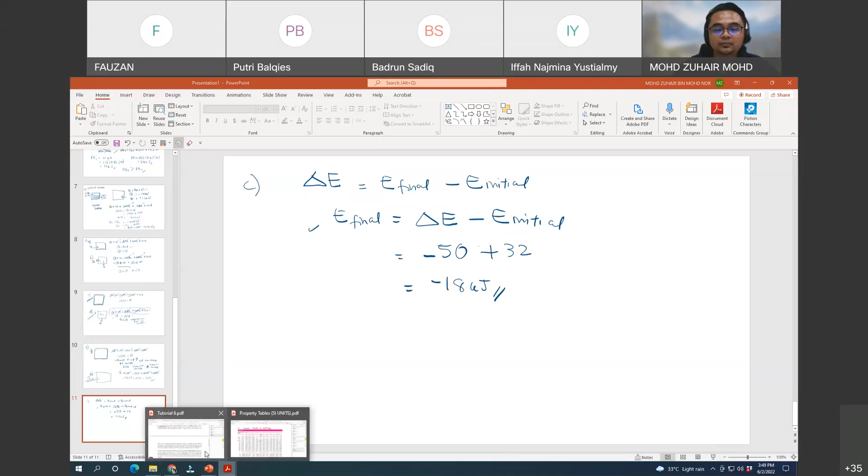Okay, so that's for number 6. I'm going to be a bit rushing here, but anyway, later just watch back the recorded video for you to do all this question. A system composed of a stone having a mass of 10 kg and a bucket containing 100

Okay, I don't want to do question 7 because I think this is a bit confusing. I haven't done it, but I'm not going to confuse you with this kind of question. But if you want to do it, then you are more than open to do it. Maybe this is a question that you can find on the internet. Basically, I can explain, but it's going to take a very long time. So you don't have to worry about doing question 7 in the tutorial. Okay, so we're going to do question 8. And this is the final question for tutorial 6.

Alkaloid, a chemical compound containing nitrogen that can be produced by plant cell. In an experiment, a closed vessel has filled with dilute water solution. And this water contains these two alkaloids, ajmalicine and serpentine. You don't have to worry when they give you scenario like this, because sometimes we feel a bit scared when there are so many scientific names. But don't worry, just grab the main idea in the question, okay?

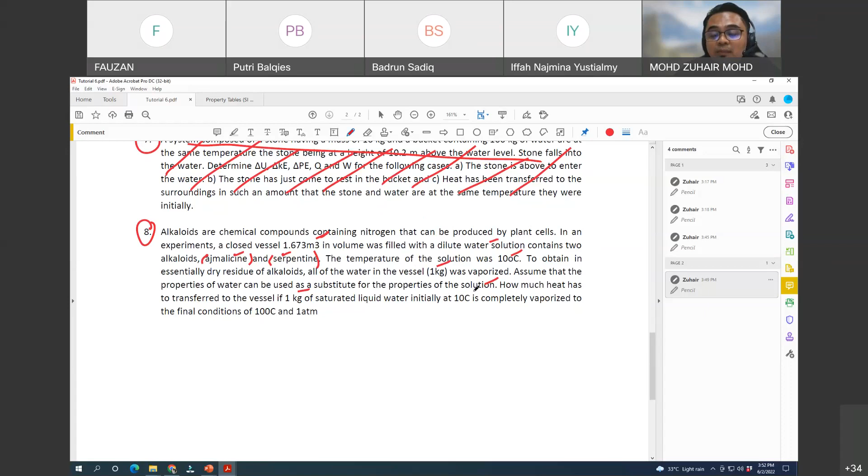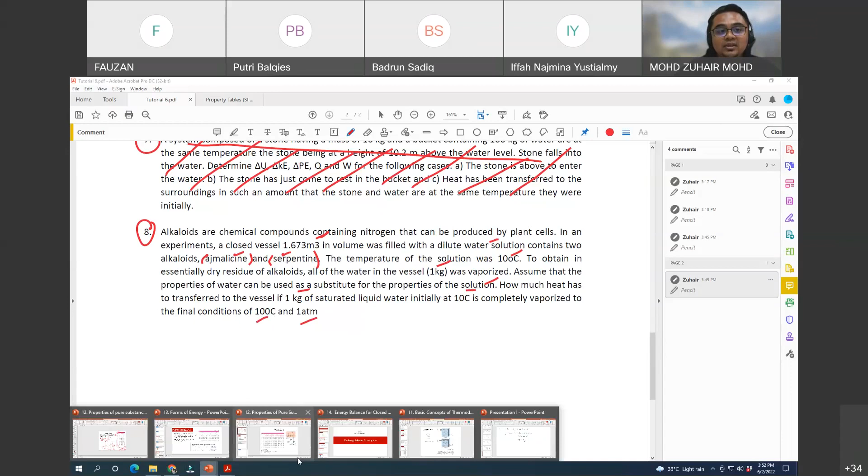How much heat has to be transferred to the vessel if 1 kg of saturated liquid initially at 10 is completely vaporized to the final condition of 100 degrees C and 1 atm. Let's just first draw the picture. I think this is the type of question that is the integration, because before this, for pure substance you referred to the steam table, and then we had the energy balance for the closed system, kinetic energy and so on, which we did not integrate with the steam table. But for this question, you need to know about the energy balance, and at the same time calculate the answer using the information in the steam table. So let's just try to do it, okay?

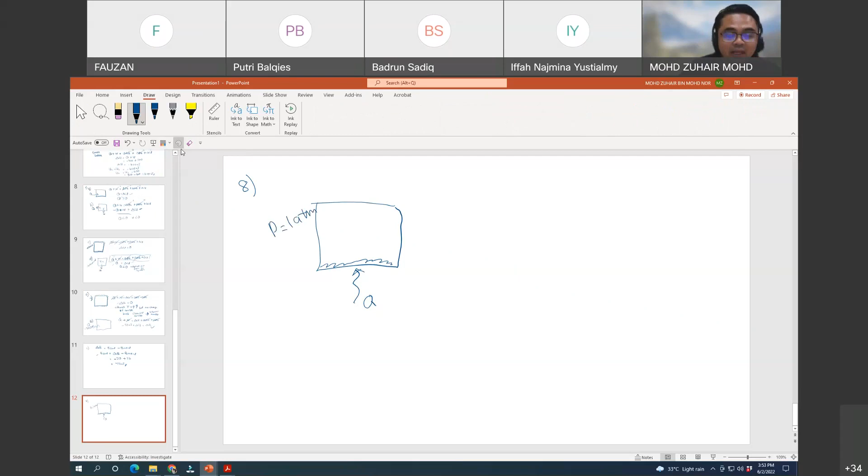Question 8. Okay, so there is a vessel. We have liquid that has been vaporized. Q has been introduced so that the water will be fully vaporized. The pressure is 1 atm. And then T1 is 10 degrees C. The liquid is 10 degrees C before it's fully vaporized to 100 degrees C. So let's just try to see this process. What is the energy involved?

Q plus W equals to PE plus KE plus U. In this case, what are the energies that are zero? This is zero, this is zero, work is zero, because all of this isn't involved. So we only have Q equals to the internal energy. So now we want to find Q. How much is the Q? But we also don't know the value of internal energy. So that's why we have to refer to the steam table, because in the steam table we have the internal energy.

We have the temperature; the temperatures 1 and 2 have already been stated here. So based on this, we can use the steam table and find the value of the internal energy. In this case, it's a specific internal energy. So I'm just going to put it here: U1, U2. This can be obtained from table A4.

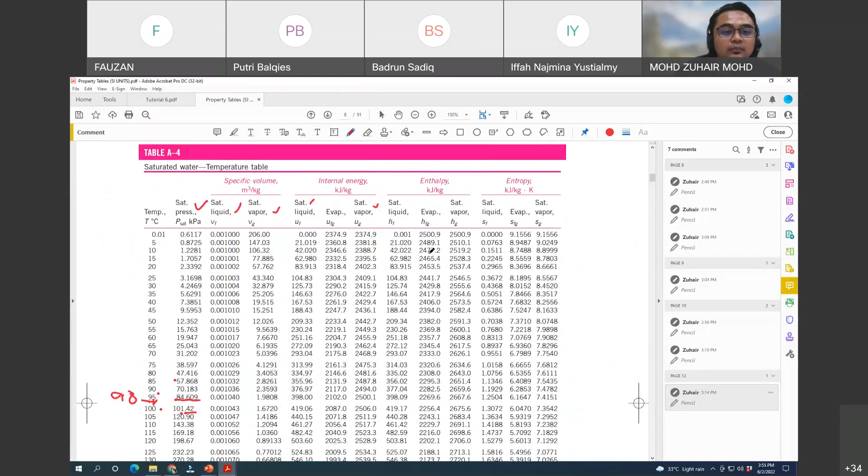Okay, but anyway, we need to be very careful, okay? We can't just refer directly to the steam table. We need to also look at the condition. This one is in liquid form, and this one is superheated steam actually. Because if you refer to the table, let's say 100 degrees C, but the pressure is 1 atm. Okay, so if we say here, this is not 1 atm. Kilopascal, 1 atm.

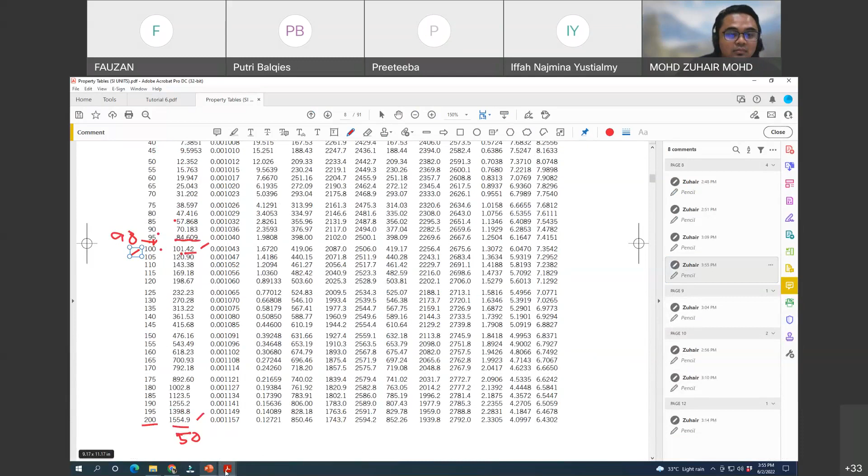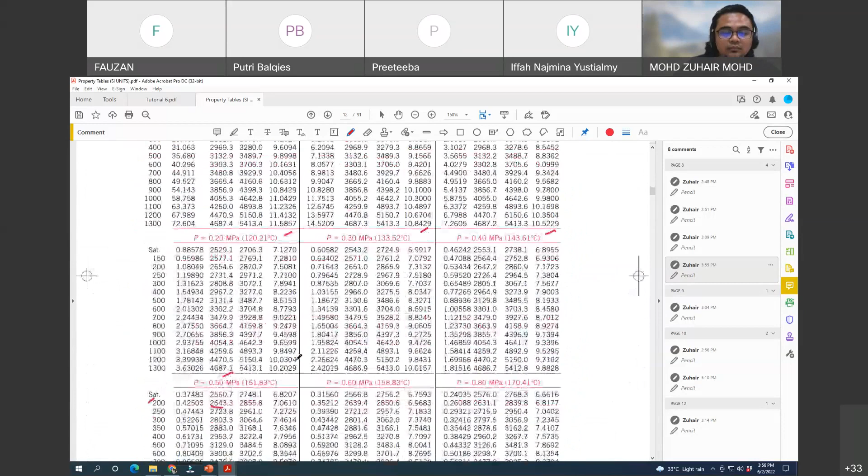Sorry, sekejap eh. 253430. So you need to find in the apa yang keluar ni.

Okay. From the steam table for U1, something else comes out. For U1, you cannot find it in the steam table, because the steam table is based on saturated steam and liquid. But in this case, this is liquid, compressed liquid. Because if you refer to 1 atm at 10 degrees C, you cannot find the specific internal energy. So I'm just going to give you the answer for this.

This is 35 kilojoule. Okay, but definitely if in the test or in the question I ask the same thing, I will give values that you can find in the table. But in this case, I'm just going to give you the value here, and for U2 it is 2506 kilojoule. Okay, this one you can find in the steam table.

And so how to find this Q? Okay, now we already have the specific internal energy. If we multiply it by mass, it becomes the energy. So we just put a basis of 1 kg. So here 1 kg times 2506 minus 35 kilojoule per kg. So this is per kg, so we can cancel this. You are going to get 2471 kilojoule at the end.